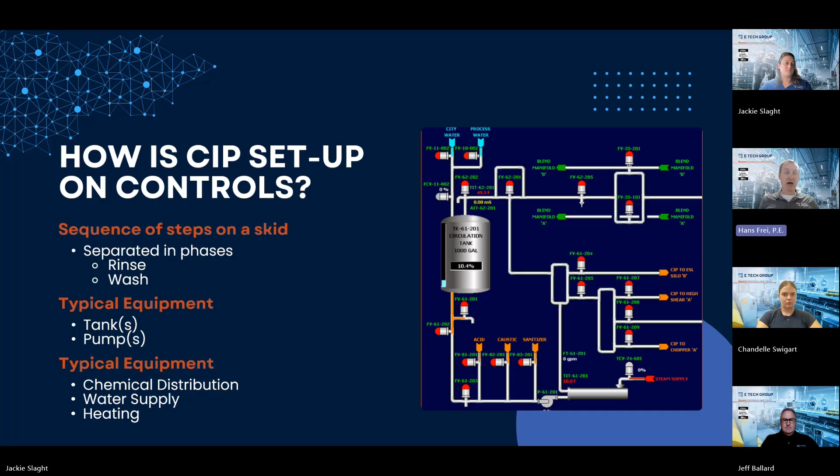Then from the control side, that's broken down into a series of repeatable phases, steps, etc., that can be used to execute those CIPs to be effective in cleaning those different types of circuits on the system. So the organization of that from a controls perspective is you have a CIP skid, which controls the delivery of that solution, be it fresh water or a heated wash solution, etc., and then it's going to be attached to different circuits.

You usually have one CIP skid, and it can be distributed out within a facility to provide that solution to multiple circuits or multiple pieces of equipment. So this way you don't have to have a CIP skid for every piece of equipment. And then those circuits have different types of CIP. There are different flavors depending upon what your current product is in the system, what you're going to try to move to, or what the regulatory requirement is.

You may just have to have a rinse, to remove that large foreign previous material from the system, or you might have a wash, or maybe you have an extended wash to help prepare the system more thoroughly for the next product, or maybe it's going to be down for a little bit. Then each one of those washes is broken down into phases. And so most of the time when we develop CIPs, we're trying to think of them as like a batch system.

If we're doing batch, we're going to create modules or equipment setup such that we can build the system to be very effective in what it's doing, and then utilize that repeatedly rather than having to build a separate instance of that phase every time that it's run with different types of circuits or washes.

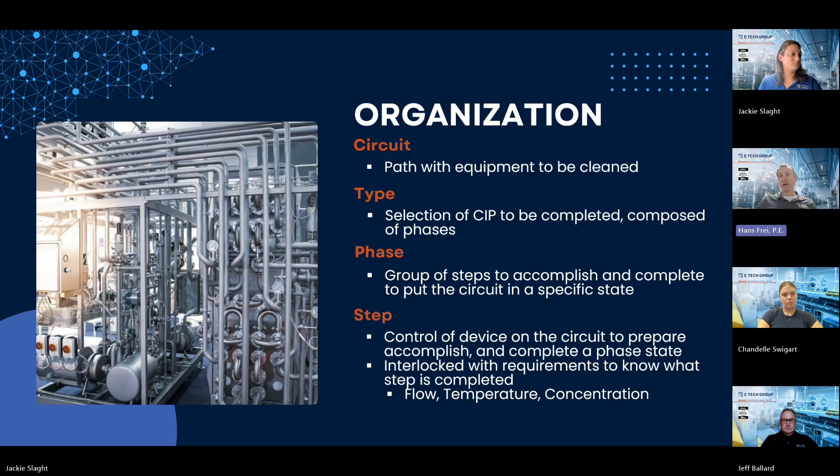And then sometimes you'll have additional steps for different types of equipment, if it's more complex or less complex, and be able to handle that within that system. So talking about that further, why do I have some of these requirements in my CIP? So why do I heat? The purpose of heating, for most instances, is to reduce how long that CIP is. Heating usually takes place during your wash steps.

And so by injecting energy through the form of heat, that makes that wash chemical more effective by being warmer, and so decreases the amount of residence time that solution has to interact with your system, thus reducing how long it has to actually run with that solution in contact with your piece of equipment.

There's also flow requirements. The flows that are required for certain systems are not just pulled randomly out of the air. There's typically two different pieces that a flow requirement will come into play within a system. One is, what is the size of the pipe that we're trying to clean or that we're flowing liquid through? And then two, do I have any spray balls that are required to help effectively clean my tanks or vessels that are going to be inside the system?

And so the larger the pipe, the larger the flow. The reason why that has to be the case is because we want to create a flow where the flow is mixing through the pipe as it's flowing. So you have to hit a certain velocity of flow that will essentially cause that mixing behavior within the fluid itself. So then the contact with the pipe itself is continuously refreshed by a different set of solution as it moves through there, and is more effective.

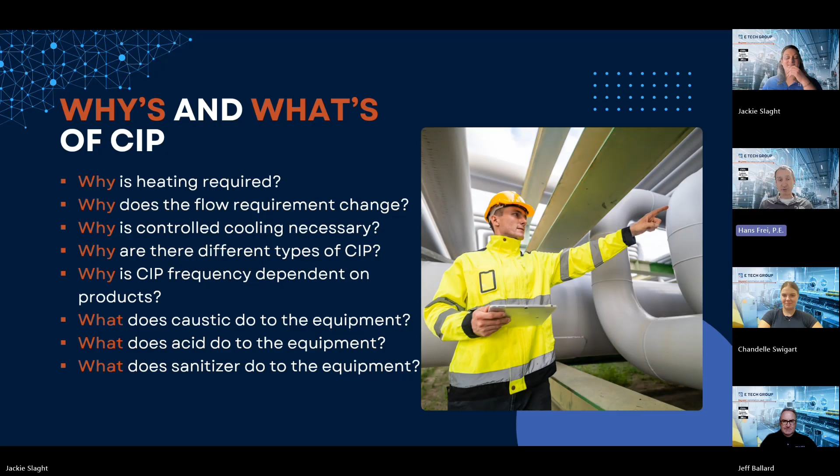Why should we pay attention to optimizing a CIP system, right? I mean, it is sometimes kind of an afterthought, but one of the biggest things is the cost, right? So just like Hans had said, you're going through raw materials. You're going through caustic, you're going through chemicals, and especially you're going through water. And also it's the time that it takes to clean your system. So those are two incredibly important things within a facility.

The next biggest thing, and we hear this a lot, is sustainability, right? Your output can't just go straight into the sewer. There's a lot of chemicals in it. It has to be treated. If you could be more sustainable using better chemicals, using less chemicals, and optimizing the system, you're just going to be better off in the long run, right?

And so also from there we come to compliance, right? So Hans hit on a couple things: allergens, or compliance in the biotech or the pharma industry. And then a lot of times that CIP is what we call a standalone system. So there may be a knowledge gap, or that system may not be as well known as the rest of the system. And that can lead to what we call Band-Aid fixes. So having us come in and optimize that system and even incorporate it into your SCADA just makes it run a lot smoother. And in the end, it's going to be a lot less headaches.

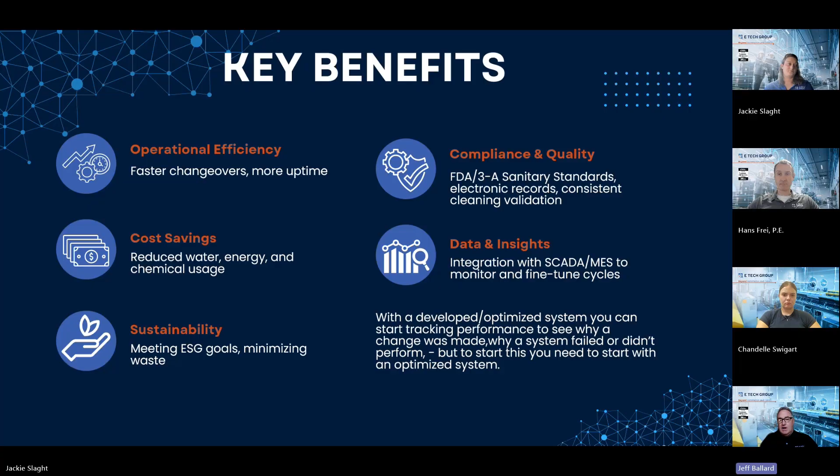So how can this be done? How can we go through and optimize a system? We have a proven record on how this can be done. First one is we just need to know what that system does, right? We want to not just assume we know what that CIP system is trying to accomplish, but actually go in, look at the logic, look at the path that it's taking, interview operators and maintenance and so forth, and document what is this system trying to do?

How is it doing it? What do those interlocks look like? What do the set points of those interlocks look like? And then provide a full package of documentation to show this is what the system is trying to do. And so once we know what it's trying to do, then we want to see where those pieces along the way can be improved and optimized.

One way, we want to shadow those operators as they begin to run a CIP and make sure that they have the knowledge or they're reminded of how to set up a CIP properly before it runs. So if they find, oh, I forgot to hook up that hose, or I forgot to open up that manual valve, well, maybe they need better indication of what needs to be done for each one, because maybe all your CIPs have different little nuanced changes that have to be done before it can even run.

Is there any mode that a piece of equipment has to be put in? And then what are the interlocks on that piece of equipment to ensure that it can actually do that? What is the instrumentation? Have they been calibrated recently? Are they providing you accurate information? The signals coming back to the PLC, are they truly representative of what is showing at the localized meter? What are those different potentials for optimizing?

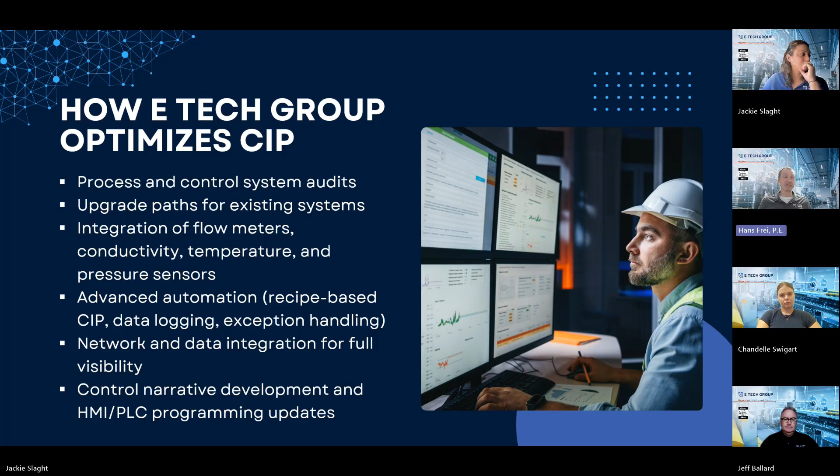So looking at the inefficiencies that we have come across typically within our systems, heating is a big one. We get the feedback from our customers, like, it takes forever to heat this system. And well, we can look in there, like, first off, what temperature does the system have to get to? And what temperature is the heating actually being told to go to?

If they're both at 150, man, it's going to take a long time to get there because there's going to be environmental loss. Well, maybe we need to give it a little bit higher set point. So if we're trying to interlock at 150, we're going to tell it to heat to 155. This way we can account for those environmental losses as that solution is going through that extended loop, and still sustain that set point that's required.

Or maybe you have an interesting loop within your system, and you need to think about either preheating or shutting down part of the circuit temporarily to actually get the temperature and then open up that circuit appropriately, so then it doesn't take an extended amount of time to actually heat. Or maybe your heat exchanger itself needs some maintenance work on it. It's just not effective. It's got scaling, or the steam or heating method is just not performing how it was originally set up.

Another one is chemical concentration. There's two sides to the chemical concentration. One is I'm trying to get to a high concentration for a wash requirement, or I'm trying to dilute it down to a low set point on a rinse solution. And so looking at the wash side, a lot of times with chemicals, I'm just going to dump it in all at once. Well, the problem with that is then you just get this gigantic plug flow of chemical concentration that's extremely high throughout your circuit.

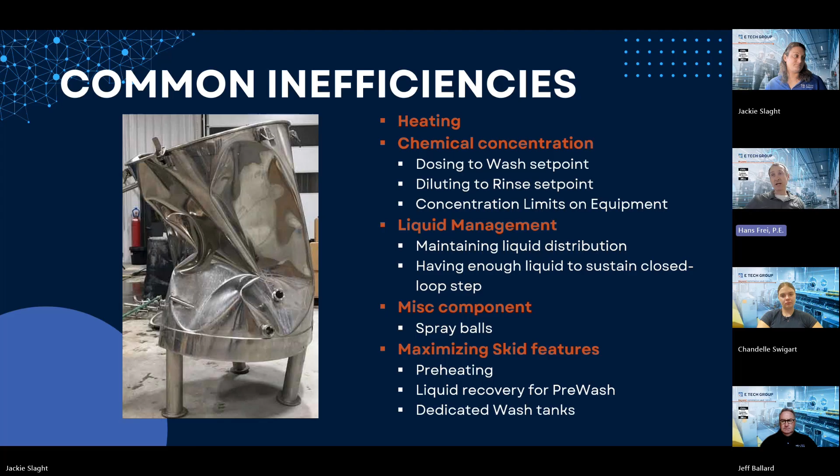A case study that we had with CIP is I had a customer and they had a newly commissioned system with a CIP, and they're like, man, it takes like 2 to 3 hours to run this CIP. And sometimes it takes 2 or more times to rerun the same CIP before quality will pass it along. And so they were taking entire shifts sometimes of running CIP. So they're running it 2, 3, 4 times before quality would say, yeah, it actually was effective this time.

And they didn't even know what the CIP did. No one knew what steps it was doing, how it was moved through the pieces of equipment on this skid. And so what we did is, first off, we examined and we documented it. Said, hey, this is what it does now. We looked at that like, okay, let's rearrange this sequence a little bit to have better liquid management, better understanding on how to clean each piece of equipment throughout the system.

Then the sequence is updated. We tested that thoroughly to make sure that it was doing exactly what we wanted it to do. And then we turned it over to operations to see how it would work. And let me remind you, this was just logical changes. We did no physical changes on the system. There were no changes of pumps or valves or pipes or anything. It was just looking at it from a PLC perspective, and then providing some better documentation of what was happening on the HMI so that we understood what step it was at.

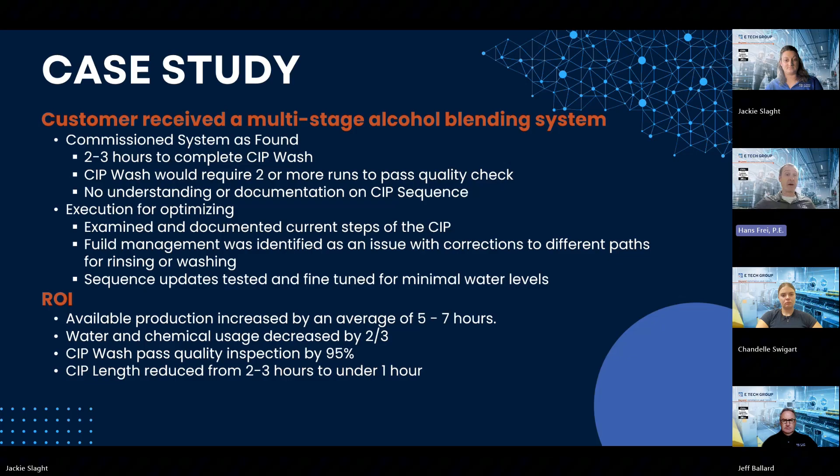But when it's said and done, the customer is just extremely happy with the result of this, because there was just a logical change on this system to be able to be more effective, liquid management, to reduce the amount of chemical, the amount of water, and then they're able to think about more future capability on the skid because of the increased production time.

So what are the possibilities of a fully automated CIP? From an operational standpoint, we want the operators not to have to babysit a CIP skid. They want to be able to set it up, hit start, and it does its thing and finishes. We don't want them to have to constantly come back and look at it and see why it's not running, why is it stuck, why is it leaking all over the place, or hey, shoot, I didn't set it up correctly, now I have to restart it again. We want to have that for the operators.

We want it to be predictable, right? We don't want to have to just sit there and wait for how long this CIP is going to take before I can actually be done. We want to know, hey, it should take about an hour. Well, we want to count on that. And then we can plan better for production and for operations to be able to take that skid back into the production environment.

We want to be able to pass. We don't want quality to have to come back over and over again and use up their valuable time to check the CIP after multiple runs. We want them to come in, check it, yep, it looks good, and then they can move on to check other things within the facility.

And also have proper acknowledgments, so reminders, hey, how to set it up correctly. I typically include, when we're dealing with chemicals, hey, make sure I'm good to add chemicals, that the area is safe, everyone knows that chemicals are going to be added. And so have some prompts in there that will help operations be more aware and better aligned on how that system should be running.